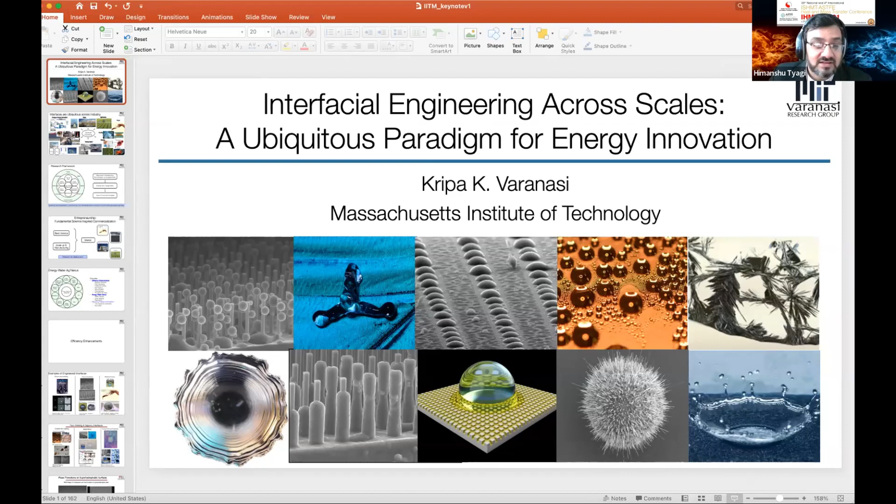Thank you so much for that kind introduction. It's a pleasure to be here at my alma mater, IIT Madras, where I learned engineering after high school. So it's great to be here and talking to all of you.

As Himanshu mentioned, my work is on interfaces, which is essentially the boundary between phases of matter, and where all the interesting things happen, including mass, momentum, charge, and energy transfer. Today I'll give you a few examples of what we've been up to over the past several years.

This is a very busy slide, but it shows how interfaces are ubiquitous across many industries, whether it's energy or power generation, oil and gas to renewables, and our work has touched a lot of these areas. Some of our recent work has been in the CO2 and hydrogen space, and also in the medical area, where we are looking at injectability of high concentration biologics and remediation of biofilms. In agriculture, we've been looking at reducing pesticide usage and pesticide pollution.

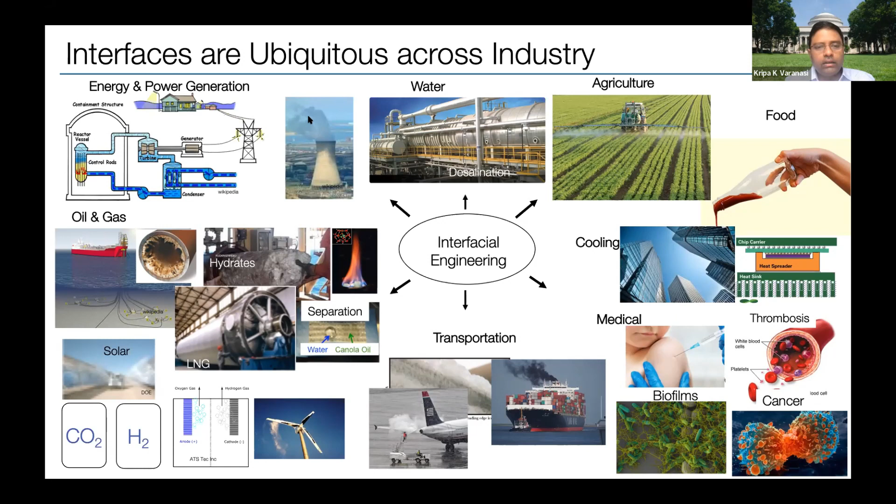Also at the energy water nexus, we are able to capture water that's given out of cooling towers, among other things. So while I will not be able to cover all these topics, I'll choose a few of them, and I realize that I have only half an hour today, so I'll try to see what I can get done.

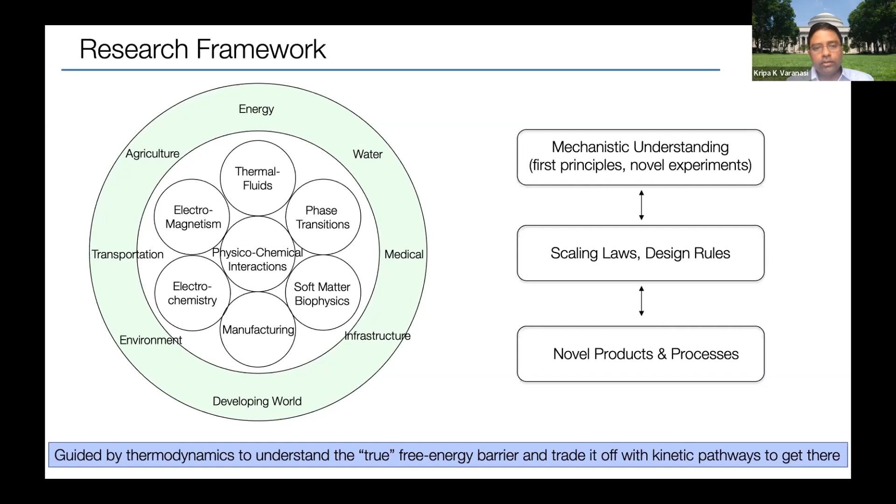Just quickly, as a group, we are very multidisciplinary. We work on a variety of topics ranging from thermal fluids to electrochemistry, and think about scale up and manufacturing so that we can take things to market. These are a few of the companies I co-founded with my former students, including LiquiGlide, Infinite Cooling, and more recently AgZen, where we are trying to reduce pesticide pollution.

As I said, the focus today is on energy, and we'll talk about energy efficiency enhancements that one could achieve by fundamentally tailoring interfaces. And if there is time left, I will also talk about a project on the energy water nexus, capturing water from the plumes of cooling towers.

So let's jump right in. Some of our efforts over the past last 10 years have been really to tailor interfaces, whether it's to reduce wetting of surfaces, such as in this case, bouncing droplets, where we've been able to overcome certain theoretical limits and reach points where you can bounce off liquids at extremely short time scales.

To phase transitions such as condensation, boiling, freezing, and crystallization, and controlling these phenomena by tailoring surface chemistry and morphology.

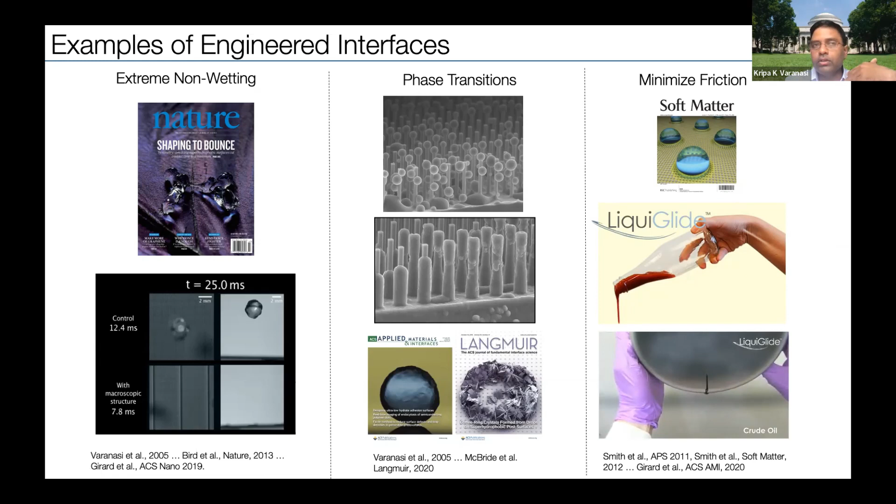And also creating these slippery interfaces where we've been able to show that we can tailor surfaces for a wide range of viscous fluids. For example, here there's a ketchup bottle where we can empty every last bit in the container, to here a crude oil that is in a container which can basically wet anything, and we are able to dispense every last drop so there is no wastage of the product.

And examples here show ultra thin coatings that we've been able to make, which can be used on condenser surfaces to promote what's called dropwise condensation, to even coating fabrics, conformally coating every fiber to create non-wetting fabrics using low fluorinated or environmentally friendly coating technologies.

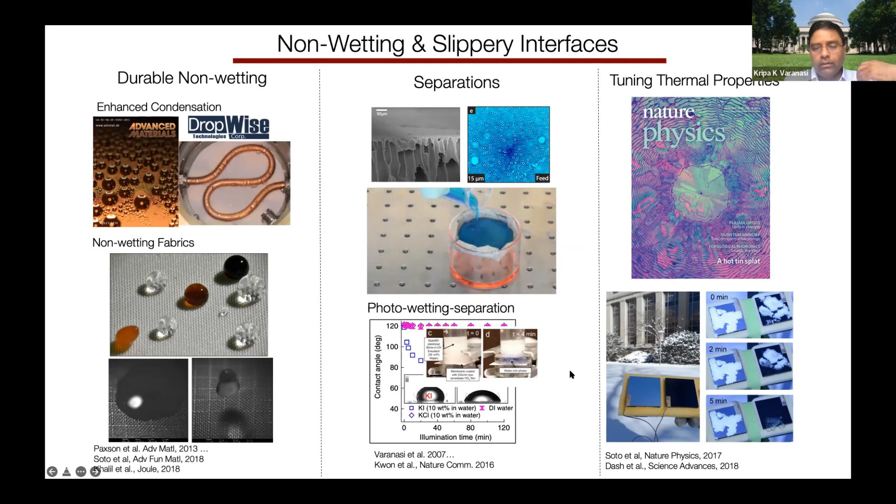One can use these to do separations, as shown here, where you can separate oil-water emulsions to prevent icing on surfaces. So I'll try to cover some of these topics today and see how far we can get.

One of the areas that got a lot of people in the surface engineering space excited was the use of what are called super hydrophobic surfaces. These were inspired by lotus leaves, where liquids bounce off readily and don't wet because of the structure and morphology.

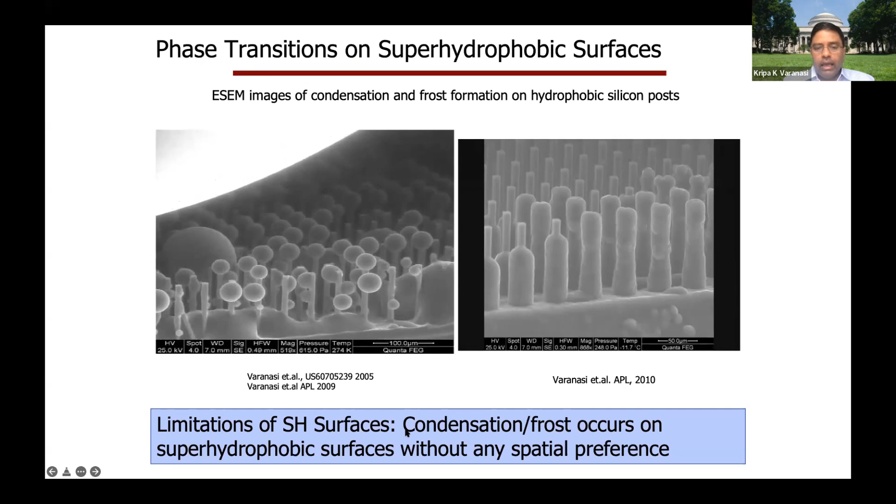But early on, when we did some experiments almost 15 or 16 years ago, we were trying to understand how we could use these surfaces for heat transfer applications like condensation or freezing. These are experiments done in an environmental SEM, where you can see nucleation and growth of droplets.

You see that they actually impale these structures, and these surfaces, which are hydrophobic for macroscopic droplets, basically transition and become wetting for a nucleating drop or frost building up on surfaces. The same thing happens when you go to a low surface tension fluid.

If you take a low surface tension fluid, it can easily wet these surfaces. So the question was how do we make this robust to a wide range of fluids? We've only talked about Newtonian fluids so far — if we go to non-Newtonian fluids, how do you make this stable?

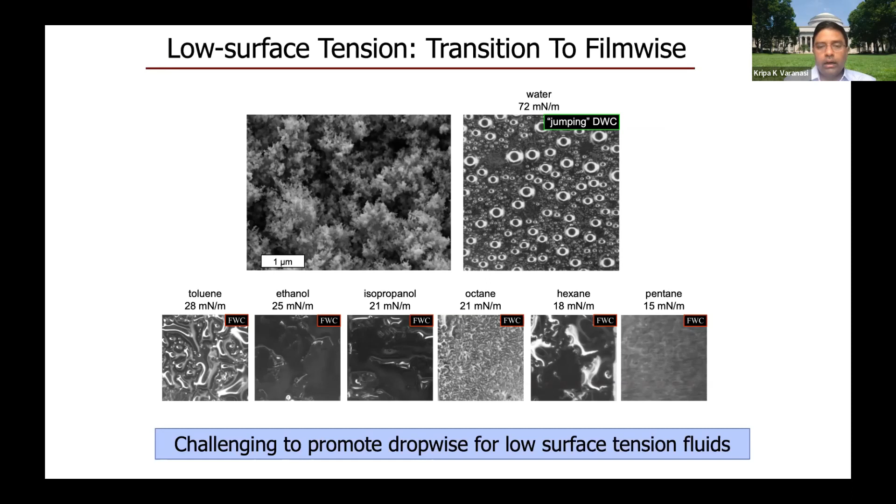In a condensation application, how do you promote dropwise condensation without being limited by infiltration of these surfaces? That led to a new paradigm in thinking about surfaces that can be non-wetting to a whole range of fluids.

Sticking of viscous fluids such as consumer products, whether it's lotions, food, or toothpaste, to fluids in the energy space like oil and gas, or things like flow batteries, or in manufacturing or medical — we are surrounded by these sort of viscous fluids.

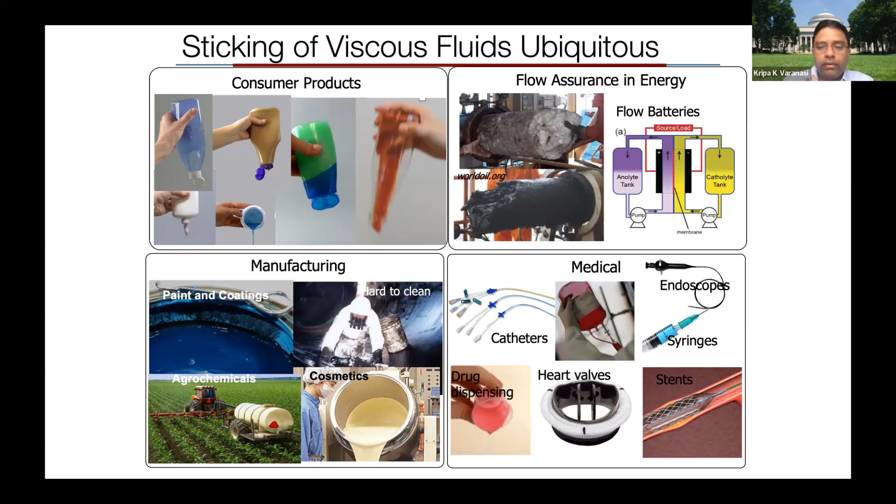The basic no-slip boundary condition essentially makes all these things stick to the containers they are in, and that leads to an enormous amount of waste. Believe it or not, almost 50 billion packages are sold every day, and if you look at all the waste remaining in them, that would fill up probably 100,000 trucks. There's a significant amount of waste because we simply can't dispense every last drop.

So here we developed a technology where we take a textured surface and impregnate it with ultra-thin liquid films. These liquid films are held there by capillarity and intermolecular forces, which allows the products to easily slip off of these surfaces.

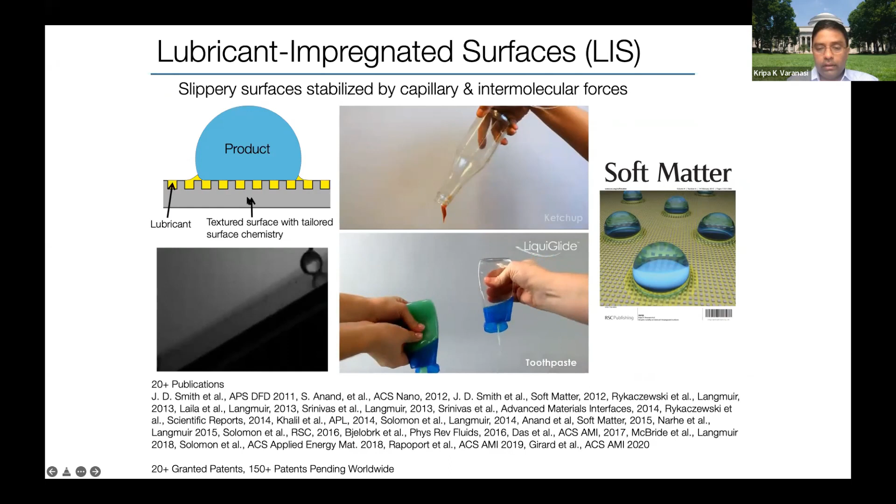You are seeing examples here of this ketchup bottle and toothpaste.

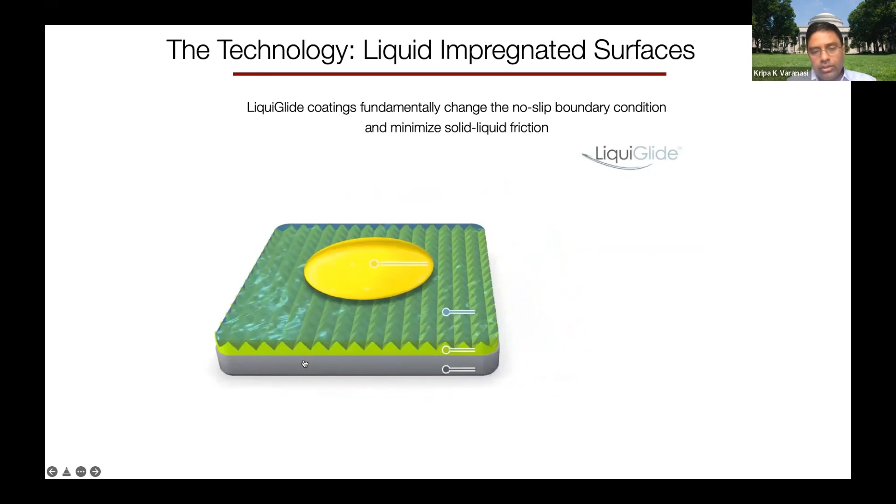The way this technology works, as I described, you take surfaces like these and create a liquid surface, or a liquid-solid composite, where the solid allows you to stabilize the liquid, and the product essentially now slips on the surface.

While this may seem very simple, the thermodynamics of this is fairly complex, and I won't go through it in detail. If you're interested, there is a paper that talks about this in detail.

This system has about 12 different thermodynamic states, of which only a few allow us to cause this liquid film to essentially spread atop these features in the presence of the product. As shown in these three scenarios, this helps retain a stable thermodynamic film that is able to give this sort of high mobility properties.

If you're able to do that, then you can really engineer products that have this feature. But if you don't do this right, you can end up in a scenario where this impregnated liquid gets displaced by the product, and then you've got a very sticky situation on hand.

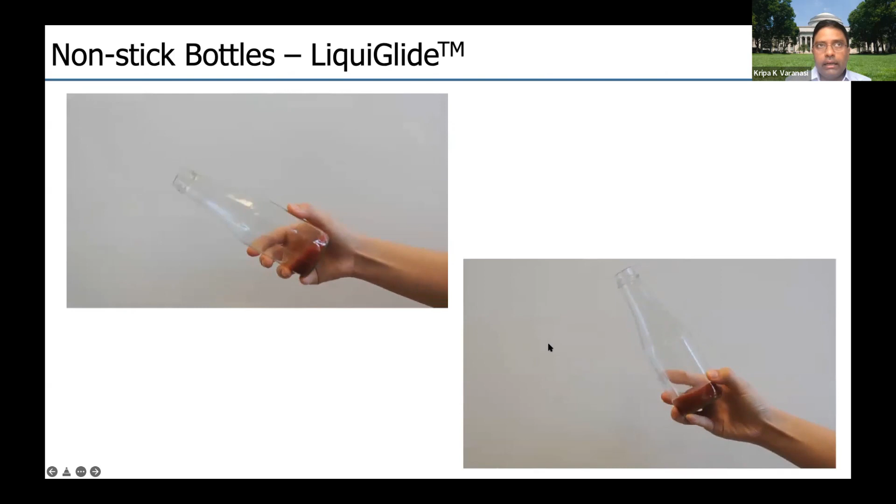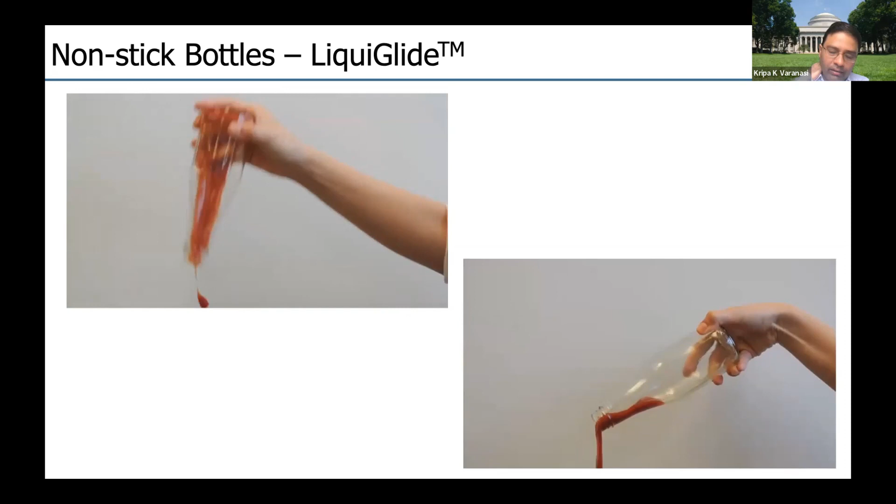So I'll show you a few examples of what we did with this. We had this technology, we knew it could apply to a whole range of products, and we were thinking of commercializing it. One of the things that came up was my wife was trying to get honey out of a bottle, and she said, why don't you apply it to this? That led us to think about bottles and consumer products in containers.

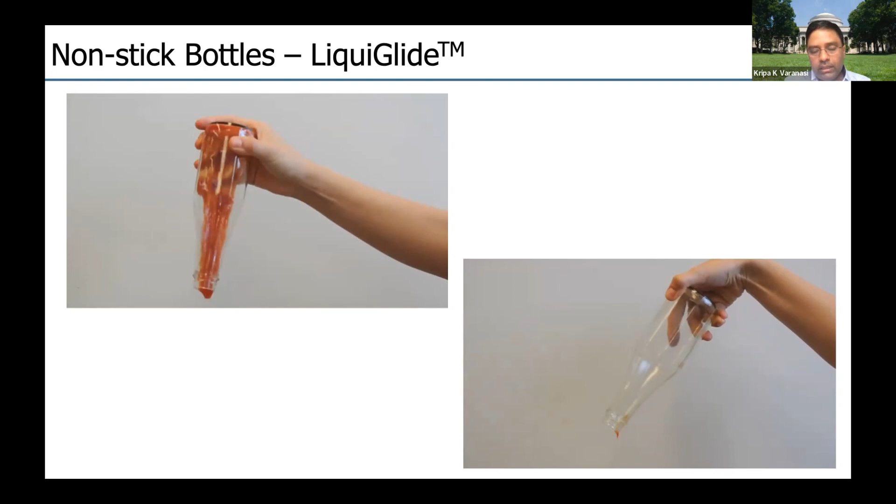We were able to design a surface entirely made of edible materials that can dispense every last drop. We tried this on a number of different materials, and soon I started finding that on average about 5 to 10%, and in some cases significantly higher, 25%, of the product could be lost. This is pretty ubiquitous.

When we actually went and released some of these, the press went kind of crazy because they found this to be a very interesting story. I'll let you watch this.

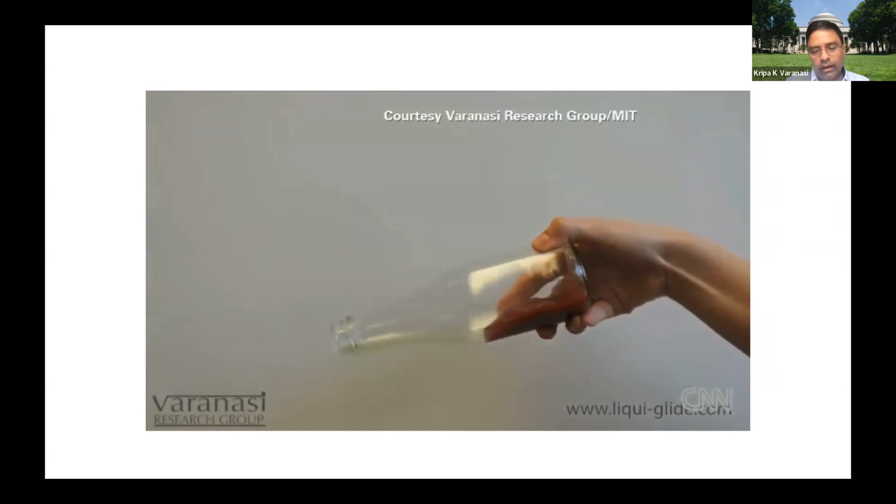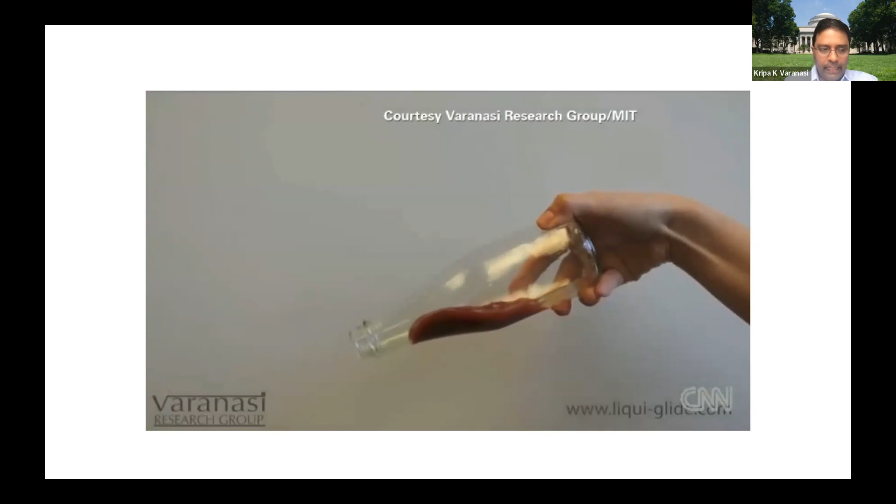Look at that thing slide. Amazing. Oh my God, our long national nightmare is over. Mechanical engineering students at MIT a few years ago came up with a super slippery coating that makes anything from ketchup to mayonnaise practically leap out of a bottle coated with the stuff. They call it LiquiGlide. Even Tony Soprano would be beholden to these students. Look how annoyed Tony gets at the dreaded ketchup clog. And if Colin starts talking, homicide. LiquiGlide, let it slide. No more banging with shoes or mallets or sucking up ketchup. For traditional bottles, LiquiGlide could mean their last gasp.

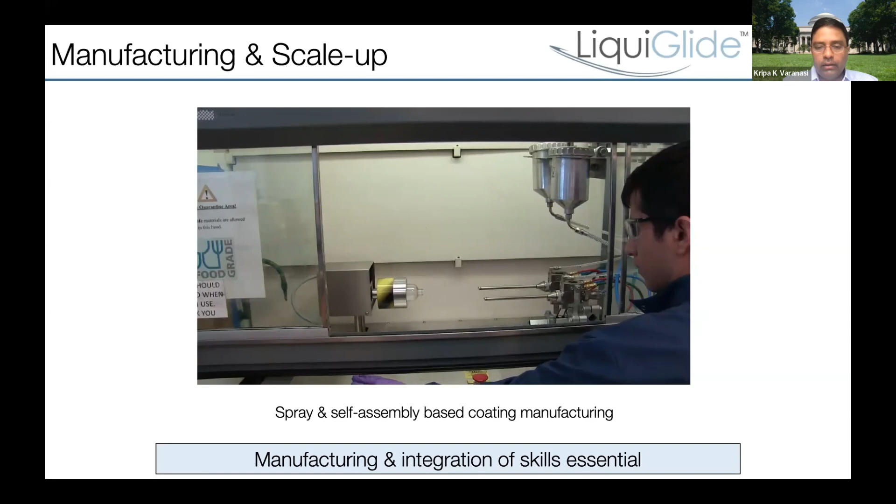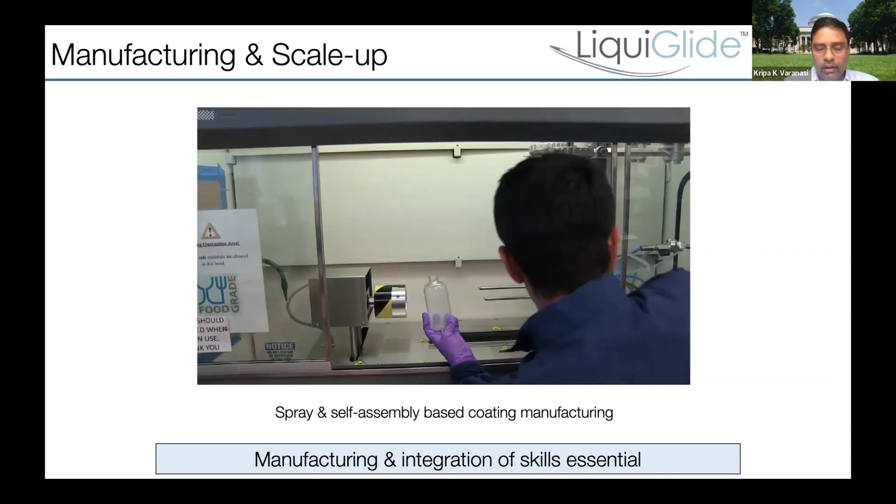The other thing was we also worked on how to manufacture and scale this up as we were developing the science. Here are some early scale prototypes where we've been able to make these coatings very easily using spray-based techniques. Today, we can do this in several hundreds of bottles per minute.

I'm just going to skip this, but very initially we also took this to market and had people react, and they were all very favorable and really wanted the product. All of that led us to start this company, and we were able to start looking at ways to scale up and take this forward.

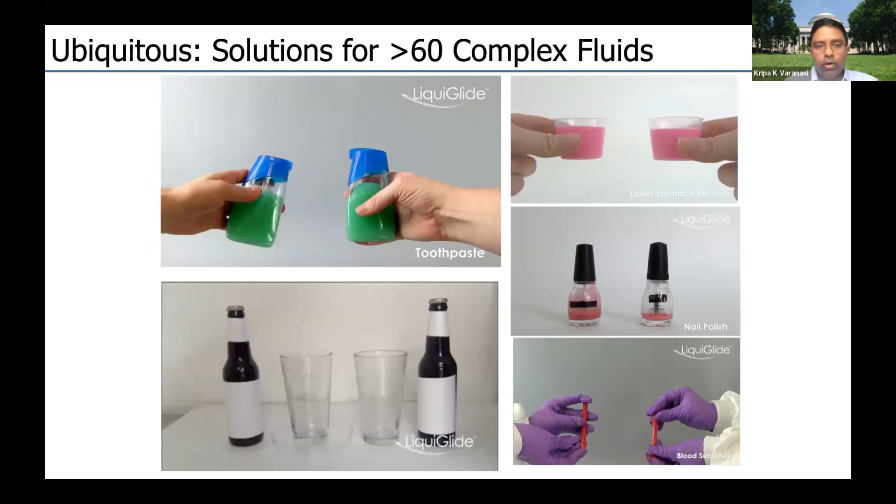We applied this again to a range of different products, and very recently, I'm glad to say that we actually launched with Colgate. For the first time, toothpaste has been sold in laminate tubes for more than a century. Things stick to these laminate tubes, but also, more importantly, they are not recyclable, so they end up in a landfill.

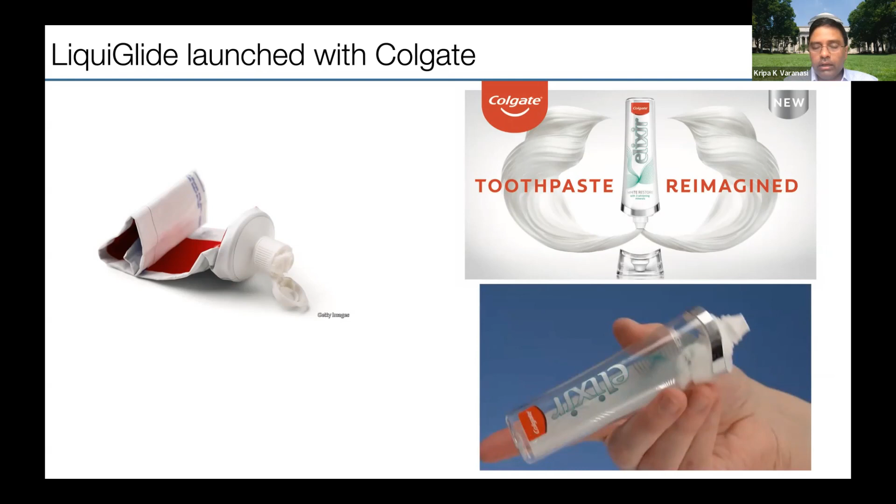Here, for the first time, there is a fully recyclable and completely transparent toothpaste tube that not only gets you every last drop but also meets some of the sustainability goals for Colgate. They've been very excited, and this has been received very well. It launched in Europe and will come to other countries, showing how we went from basic science and experiments in the lab all the way to market, and we were able to launch this product and put it on the shelf.

This sort of won a number of awards in the packaging space, and Colgate has been extremely happy with this product. And we are taking this to other things like cosmetic packaging and so on.

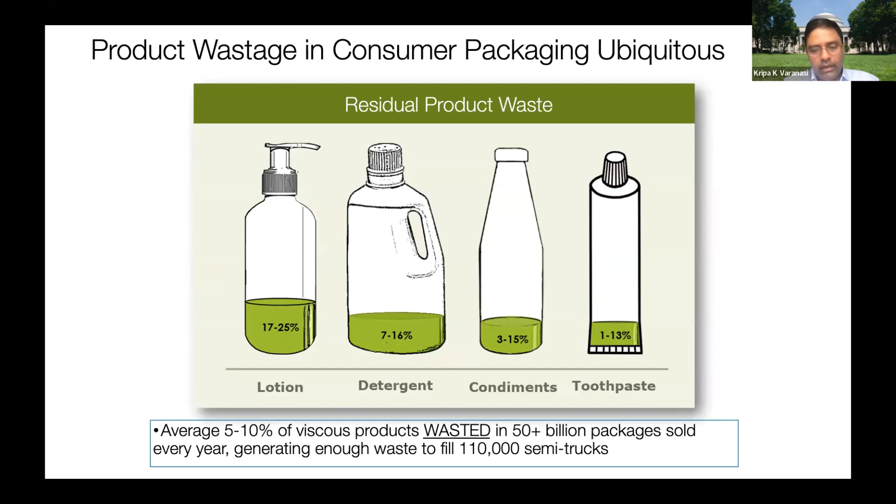So coming back to the bottom line, we can actually get rid of this waste. And what that means is, when you're looking at sustainability, the amount of carbon footprint left in all that wasted product, no one even thinks about that. So we can save all of that. Also, when you leave a product behind, the package is not easy to recycle, so you have to wash it out, and there's a significant water footprint. Our goal here is, with this technology, we can really reduce the CO2 and water footprint by eliminating waste. But one can also concentrate products and thereby reduce the amount of water you're shipping around. Most products have to be diluted because it's easy to dispense, but with this technology, we can make concentrated products and simplify all of this plastic packaging.

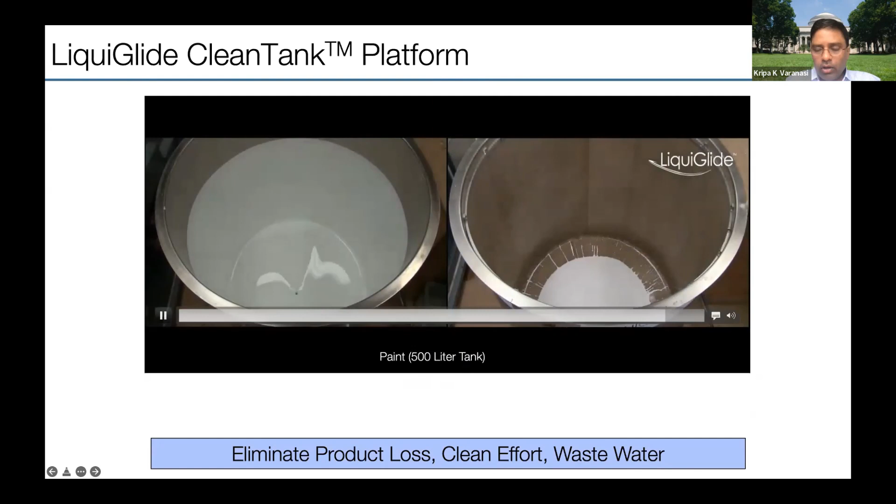There are a number of other applications of this, whether it's in manufacturing. Here you can see we can apply this to large containers, where in this case paint is being dispensed. In a traditional case, you have paint stuck here, so you have to use water to clean it, and that water comes out as wastewater that has to be disposed. But with this technology, you can get every last bit of the product, and you don't have to clean these surfaces.

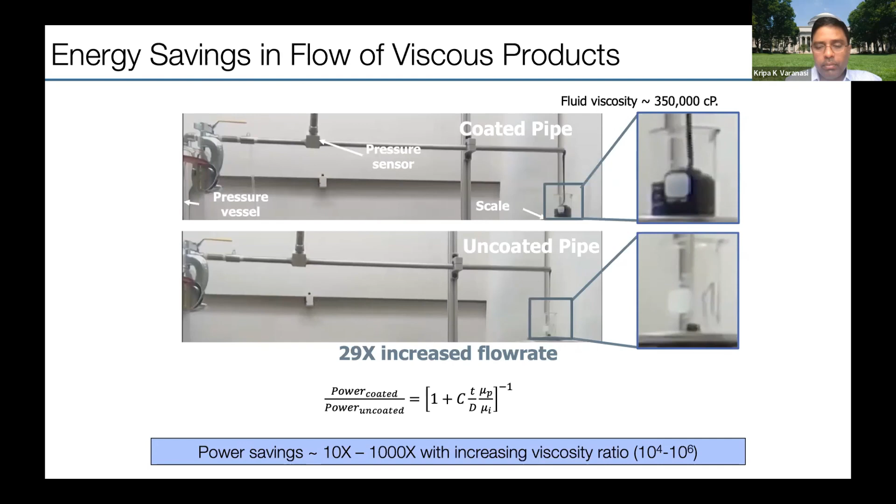One could also reduce friction drag in pipes. Here you can see that by applying this technology, highly viscous products can actually be passed through pipes, and you can reduce friction, and thereby pumping power, leading to significant power savings in pumping.

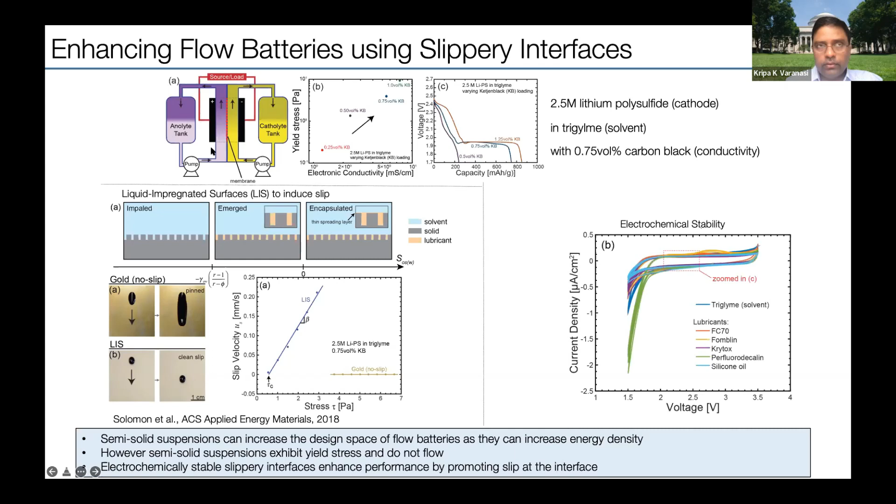Here is an example where we use this technology in flow batteries, where the interesting thing is you're using the electrodes of both liquids, and the capacity increases when you increase certain ingredients, such as carbon black. But when you do that, these liquids become basically semi-solids and they don't flow, which is a big limitation. But again, by using these surfaces, which have to be both slippery and electrochemically stable, we can create flow batteries where you can flow the flow electrode even when it becomes highly viscous, and you're able to increase its performance and capacity.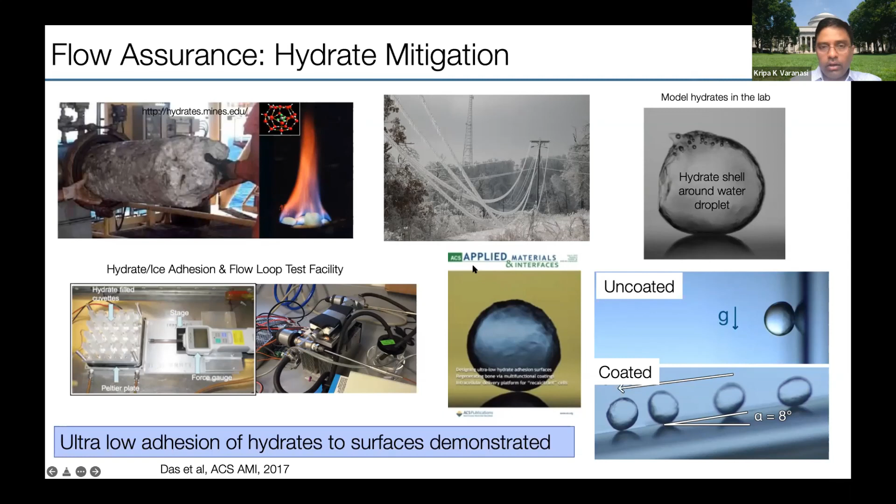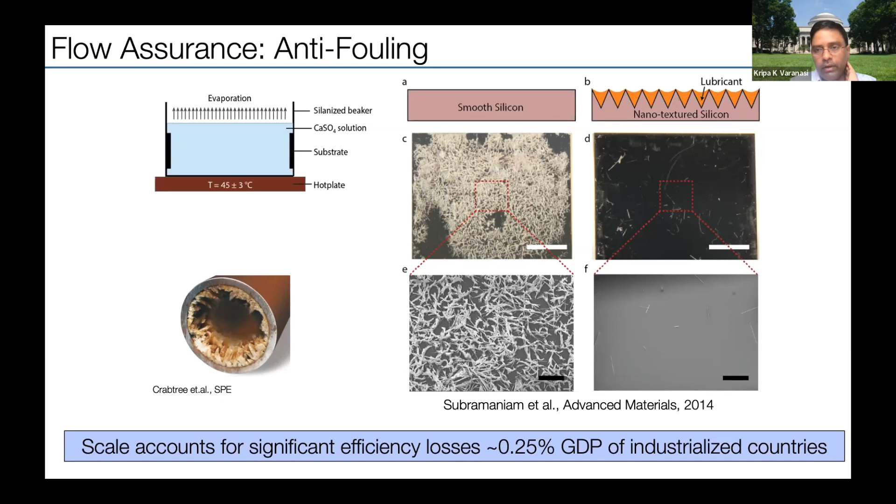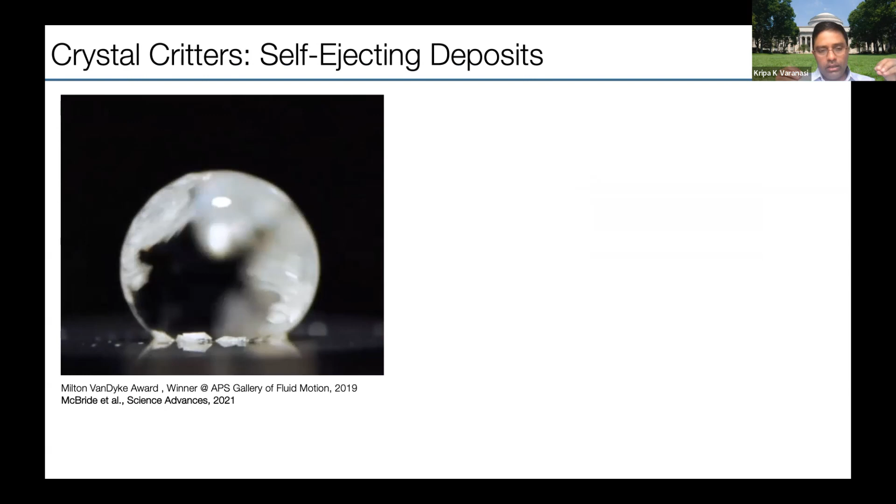Another interesting study we did recently was using the right kind of nanotextures, as in this case with an evaporating saline drop. What happens is you can actually control crystallization, or confine it to certain points, preventing lateral growth of crystals. Once that happens, it can cause crystals to self-eject from surfaces. So here you can see this fouling material, which would normally have easily fouled the surface, is able to grow legs and self-eject. And since this looks like a weird bug, we named it a crystal critter.

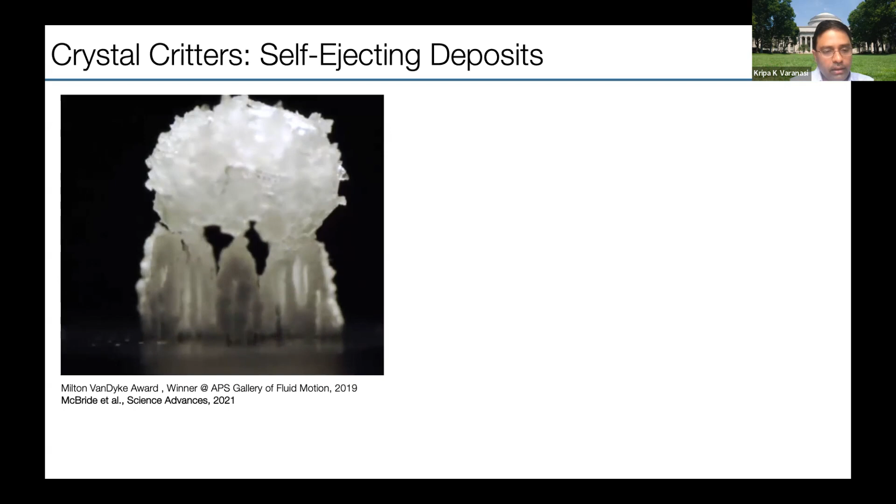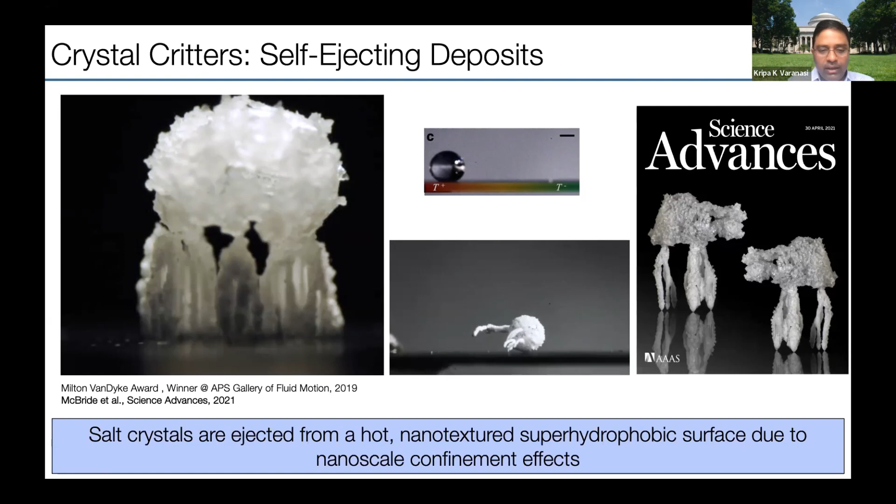By using temperature, you can do some interesting things. In this case, you can actually create a temperature gradient and cause these legs to form, causing this critter to move away from one end to the other in a way that this fouling material ejects itself and walks away from the surface. We were able to create something that, if you're into Star Wars, looks like an AT-AT walker. Shows that we're having fun doing science as well.

Another interesting thing with these surfaces is that because they have very little adhesion, even when you apply a thermal gradient, you can induce what's called thermocapillary forces. We were able to see pretty high velocities, unlike anything for a thermocapillary effect, getting to millimeter per second kind of droplet velocities.

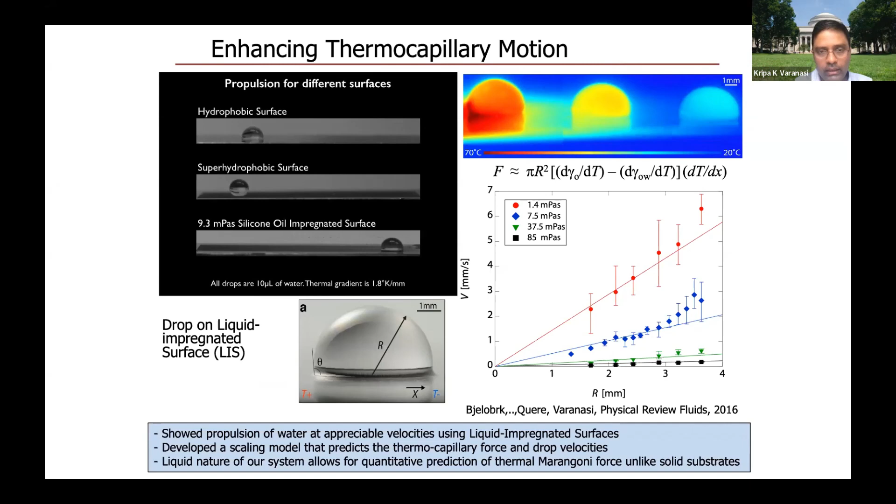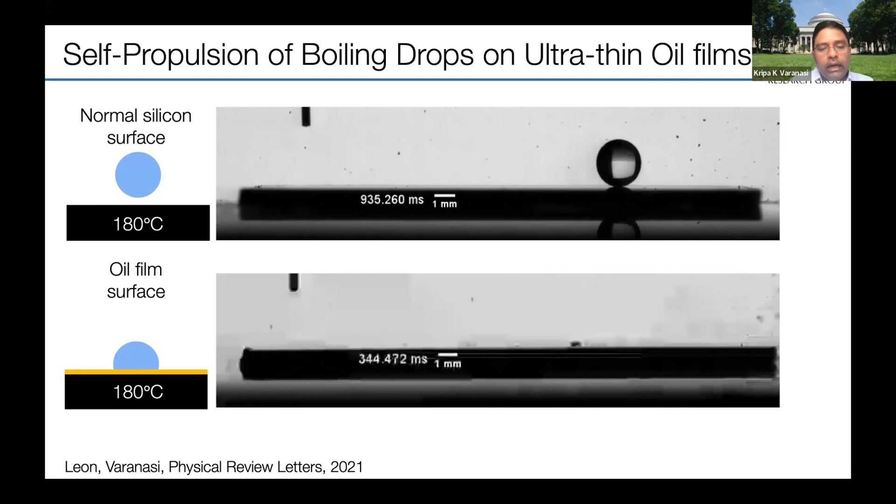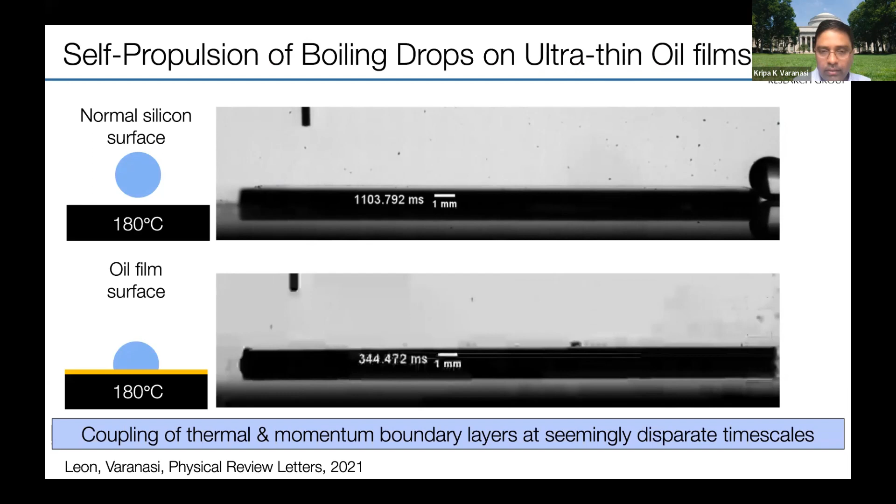This is, in fact, a very cool coupling of thermal and momentum boundary layers at disparate time scales. It's a very interesting effect which, given the limited time, I'm not able to go through.

One can then use these technologies for applications like heat exchangers, whether steam cycles, liquefaction, or refrigeration. We have condensers and boilers, and if you look at power generation in general, almost 85% of the install base today uses steam turbines for conversion.

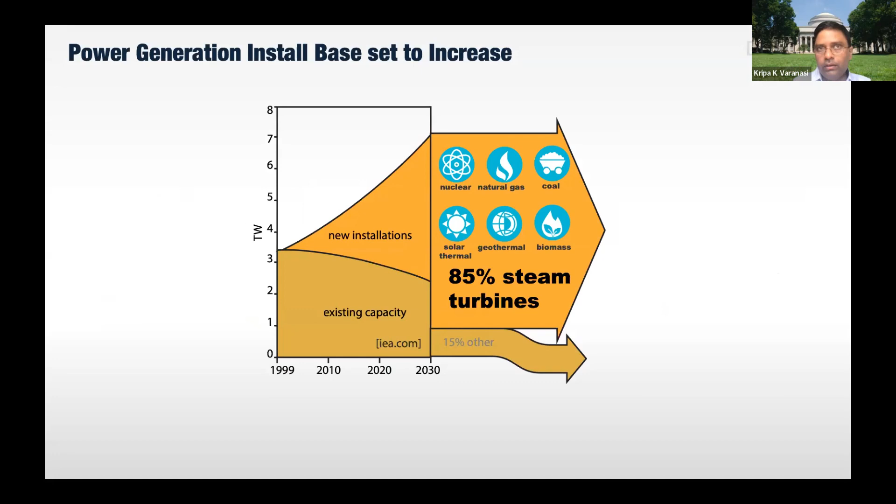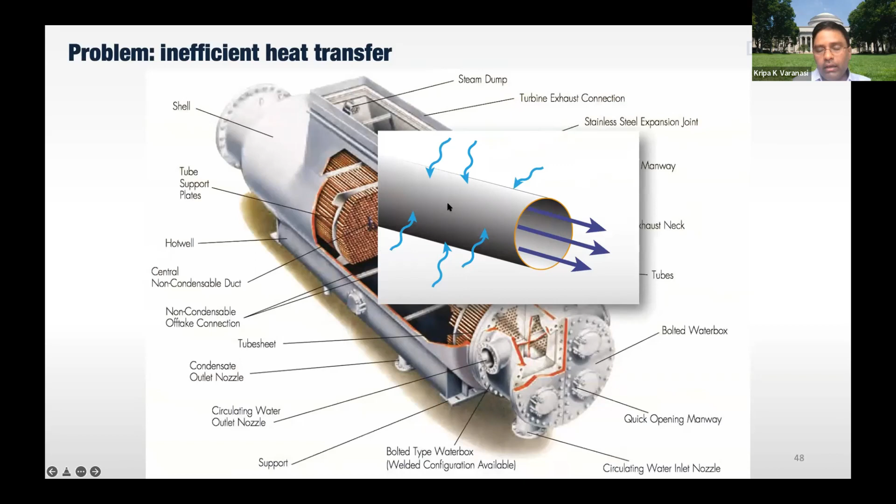One of the key things, of course, is you have your condensers and boilers, and in all of these cases, you have a condenser tube where a water film or liquid film forms on the surface, and that leads to a resistance for heat transfer. The film becomes a resistance, but you're able to shed these as drops, which has been researched for a long time. Then you can get significant increases in heat transfer, and we've been able to show almost 7 to 10x increases.

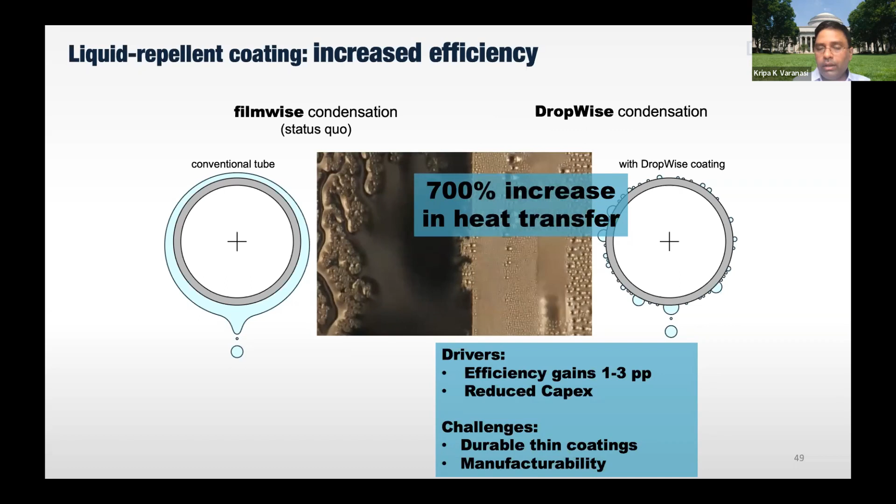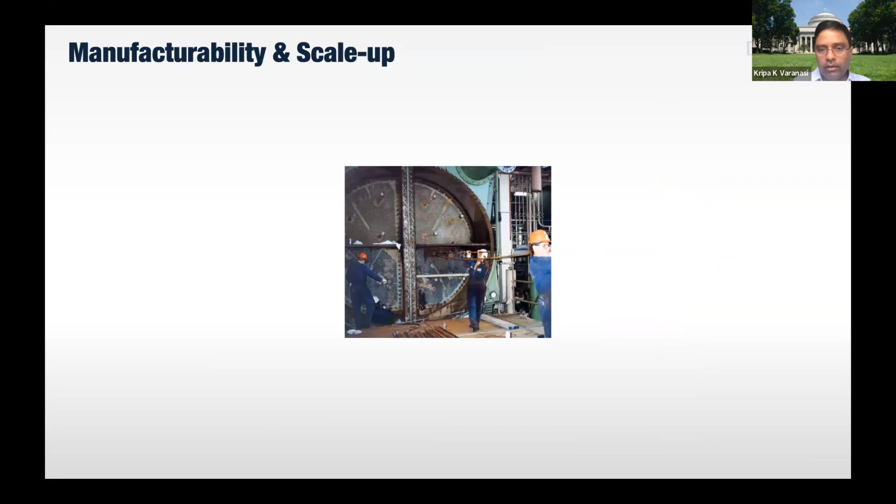But the key point here is, why is this technology not applied across industry? The issue is that you have challenges to durability and manufacturability. What I mean is, if you take a regular industrial condenser like this, you can see these tubes are just slammed into these slots, and these things are pretty large in scale.

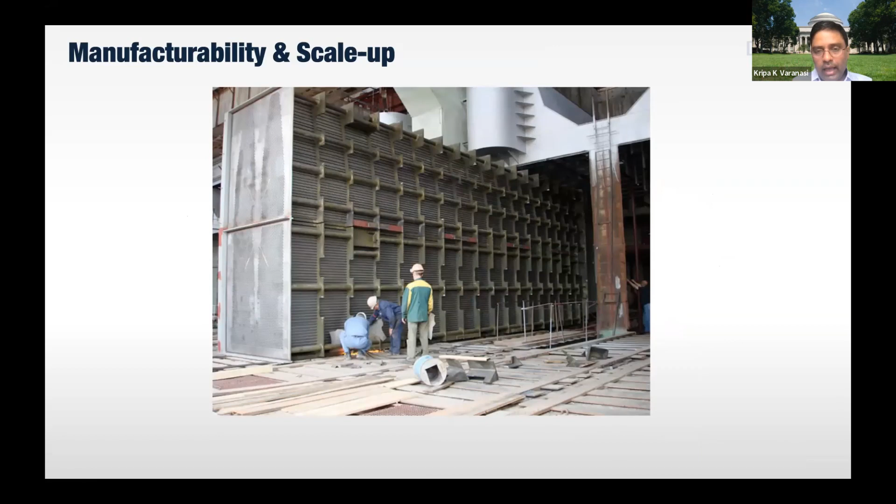Coating a tube one by one doesn't actually make economic sense. And if you go to condensers like these, which are in oil and gas, they have crazy shapes, and it's almost like you can't even coat them, and you can't even take these tubes out. So you should be able to do this in situ and on a retrofit basis.

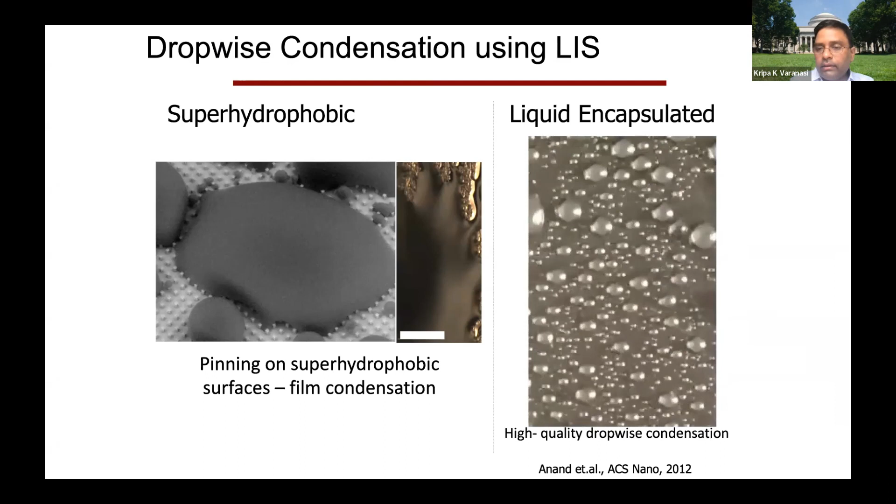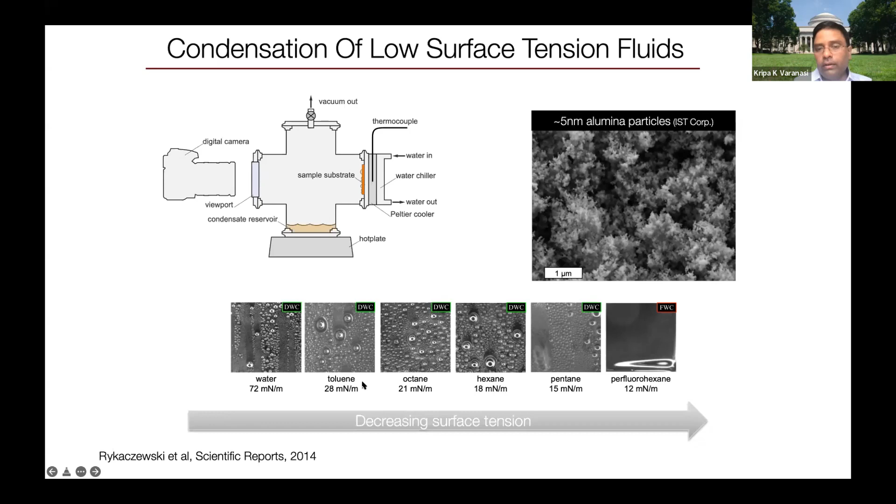As I mentioned earlier, if you just use a super hydrophobic surface, it's not going to really work because you'll end up forming these films. If you do liquid infused surfaces, you can get a certain amount of robustness, and you can maybe spray coat these surfaces. But even then, the issue is durability and longevity over a long period, almost like 5 years. We've shown that you can apply this to low surface tension fluids as well. And knowing all these issues, we actually developed a totally different technology.

This uses room temperature vapor deposition, where we're able to create less than 100 nanometer films that can be applied to a range of surfaces, because this system can conformally coat these tubes or other heat exchange surfaces.

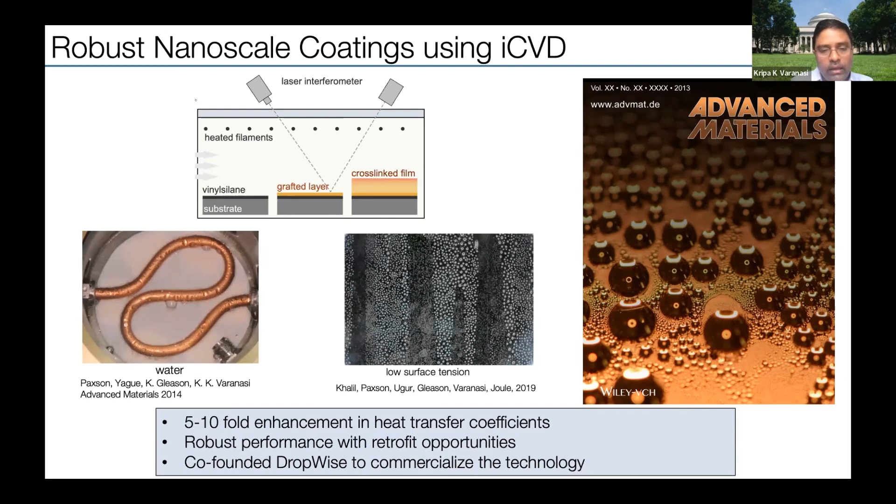That led to a pretty robust way to do dropwise condensation, which could also be applied to very low surface tension fluids. Low surface tension fluids are notoriously hard to condense in a dropwise manner because they want to spread on any surface. But by creating low hysteresis, we're able to achieve dropwise condensation even for these kinds of systems, and actually boost heat transfer quite significantly.

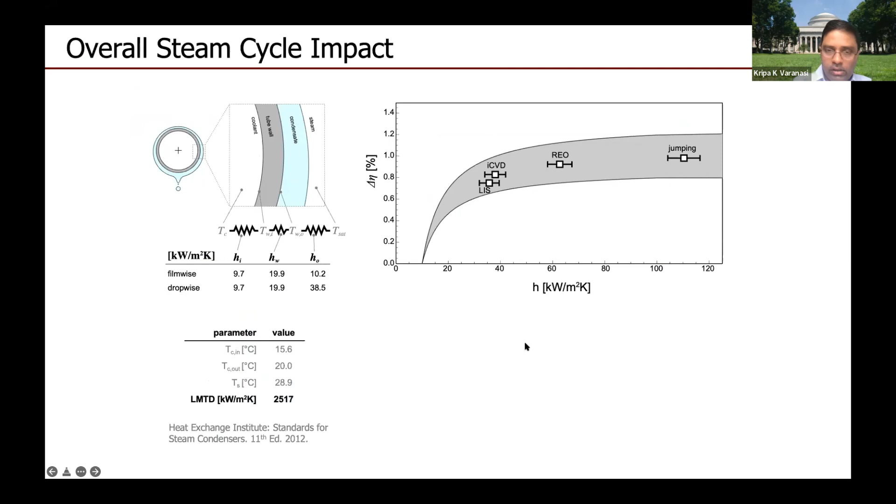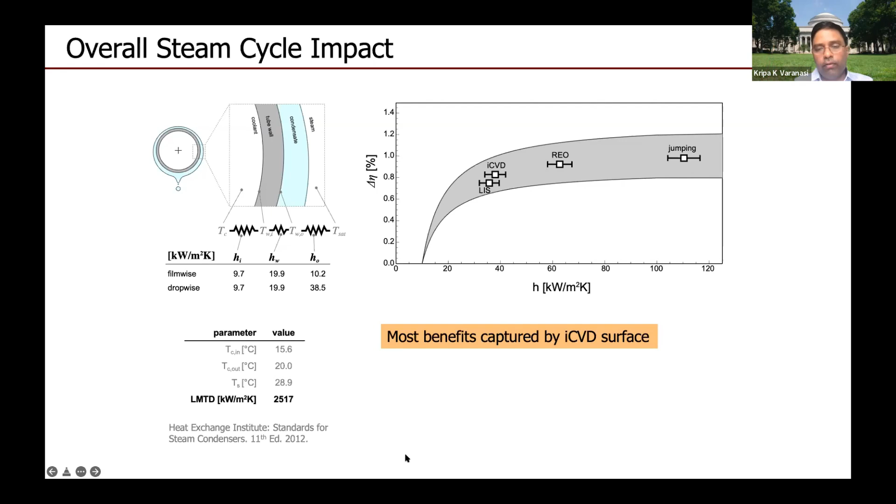So the key is, how good is good? What you find is that in terms of efficiency gain, because the condenser resistance is one side, but there's also the coolant, eventually you can reduce this and the other side starts to catch up. So there's really no point going to significantly high gains in heat transfer because the other side will catch up. One could stay in that zone where you get almost a 3 to 4x increase, and that's actually pretty good enough.

So I'll switch gears in the last few minutes to boiling. This is an example of a Leidenfrost drop, which you probably see in your kitchen, where when you heat up a surface, the drop bounces off on a hot surface. That actually limits cooling, so we have created super hydrophilic nanotextures, in fact a hybrid surface that allows liquid to actually adhere.

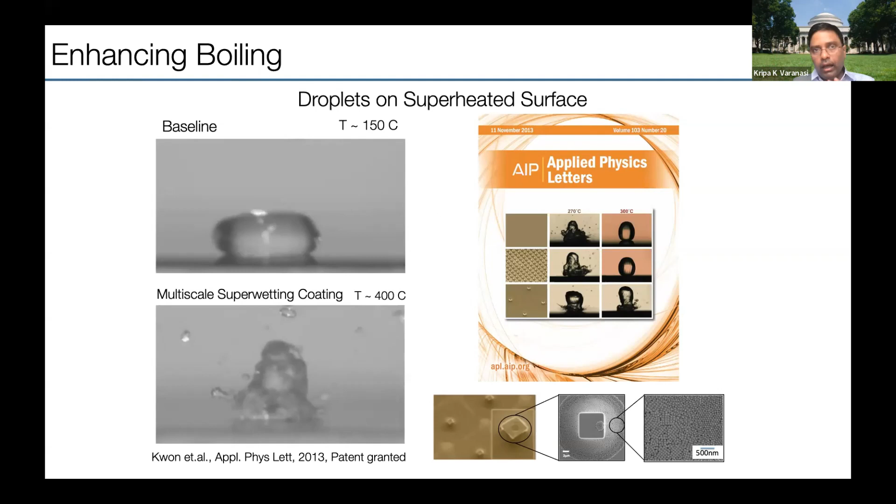The key point here is, if you make these dense nanotextures, it doesn't work, because the vapor pressure will actually kick the droplets off. So what you want is a hierarchical surface where you allow for vapor escape while still causing wetting of the liquid.

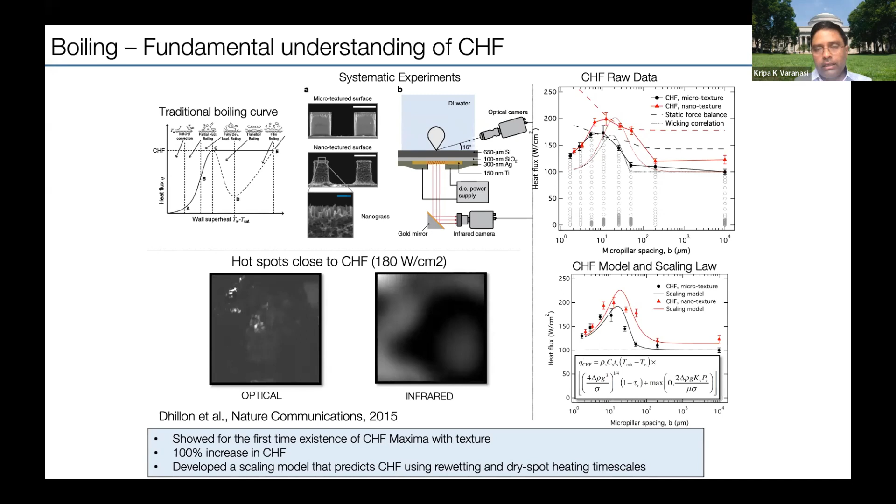If you take this to pool boiling, we've been able to show some nice studies using simultaneous high speed and IR camera, visualizing these boiling bubbles. We're able to show that you can get a significant increase in critical heat flux with texturing because it helps re-wetting the liquid. But there is a limit, in the sense that you should be able to re-wet the surface before a dry patch can grow. What's limiting the re-wetting is actually the viscous resistance also posed by the surface textures. So capillarity helps to wick, but viscous resistance will prevent you from getting there.

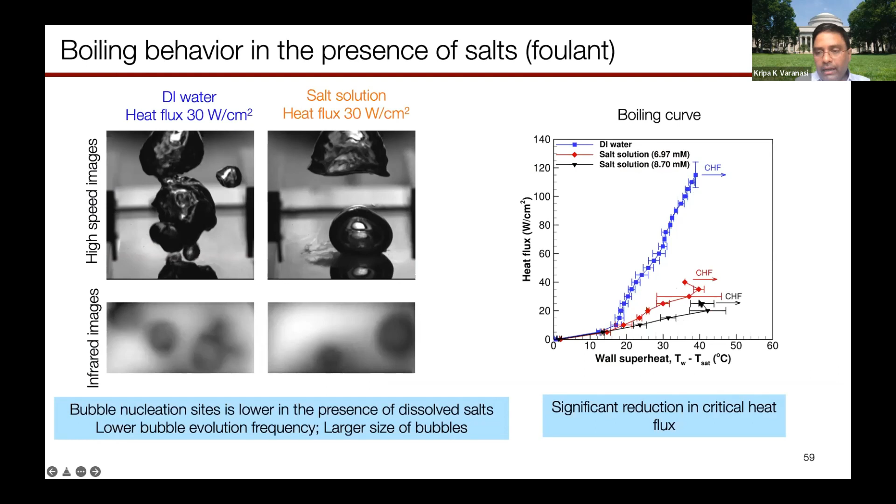And then lastly, the use of saline droplets. When people look at boiling, they usually look at pretty clean DI water or clean liquids. But actually our real fluids are not that clean. So here what we have shown is that if you use even a little bit of foulant, like in this case salt, the critical heat flux dramatically drops. That's because you get crystallization and deposits of fouling layers building up, and that leads to pinning of bubbles and growing of hotspots.

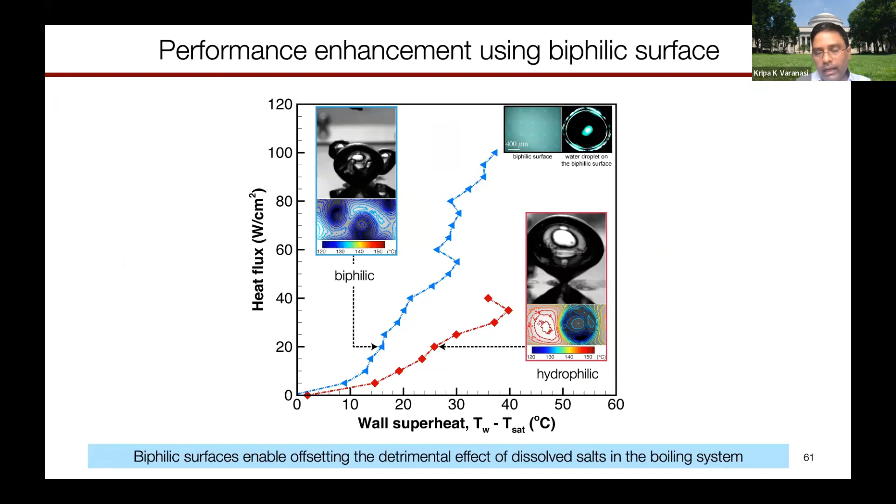Counterintuitively, we found that if you go to a hydrophobic surface, which is not good from a bubble perspective because it holds the vapor, it actually creates a region where you don't have supersaturation or buildup of scale in this case. By using a hybrid biphilic surface, you can promote a situation where you reduce the buildup of these foulants, and so in a real scenario this can give you enhancement and prevent any critical heat flux issues.

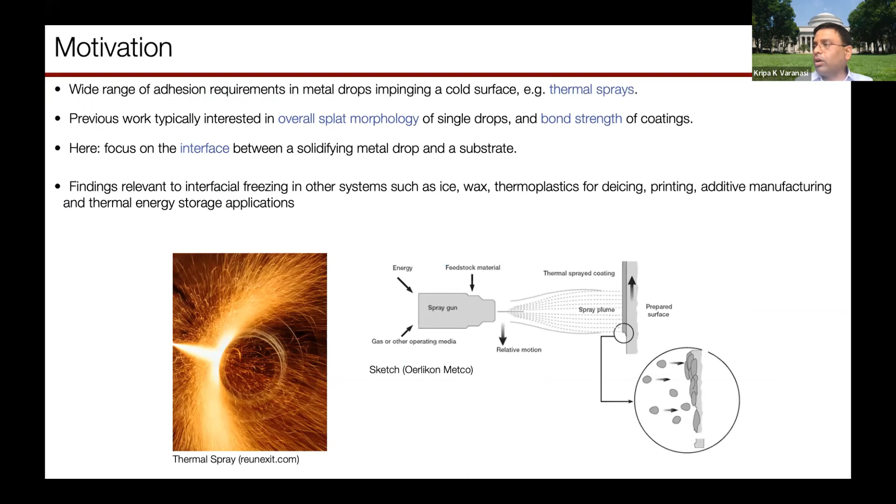Believe it or not, about 40% of total freshwater withdrawals in the US happens, is earmarked for power. Globally, about 3 trillion gallons of fresh water goes through these cooling towers. If you take a single 600 megawatt power plant, it uses as much water as 100,000 people could use, about 1,000 million gallons of water. This also costs a significant amount of money for the power plant, and in some cases people are not allowed to produce plumes.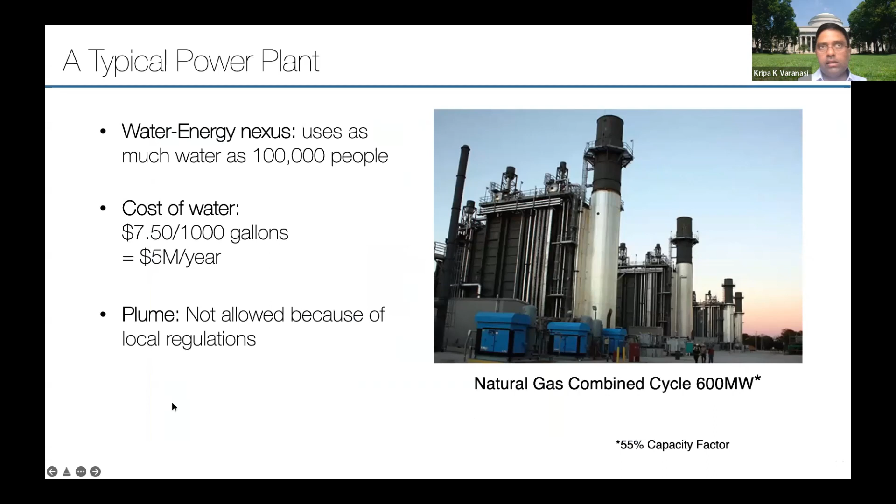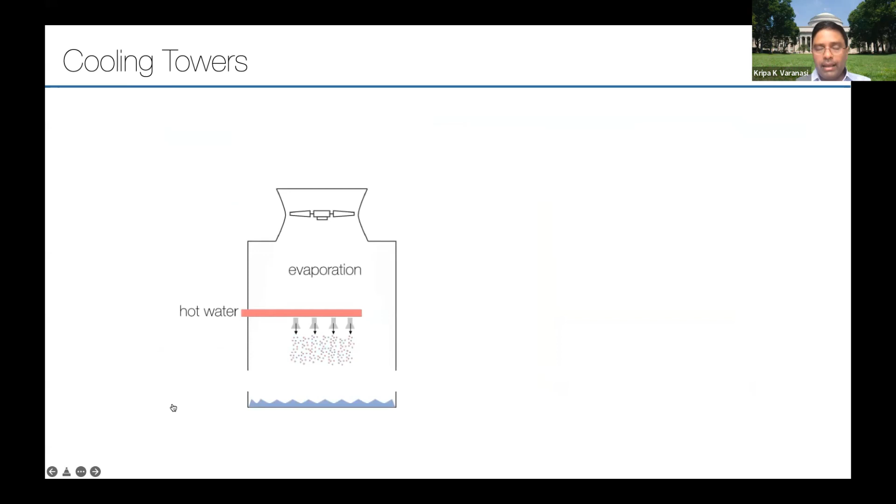For example, if you're near an airport or an urban area, this is a great place. If you're able to capture those plumes, that can have a significant impact on the energy water nexus problem, and in fact the water problem that is a global water scarcity problem.

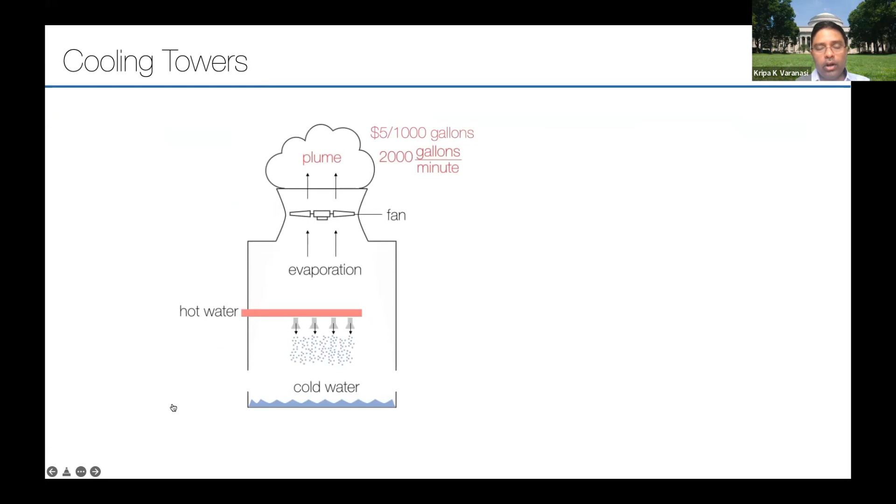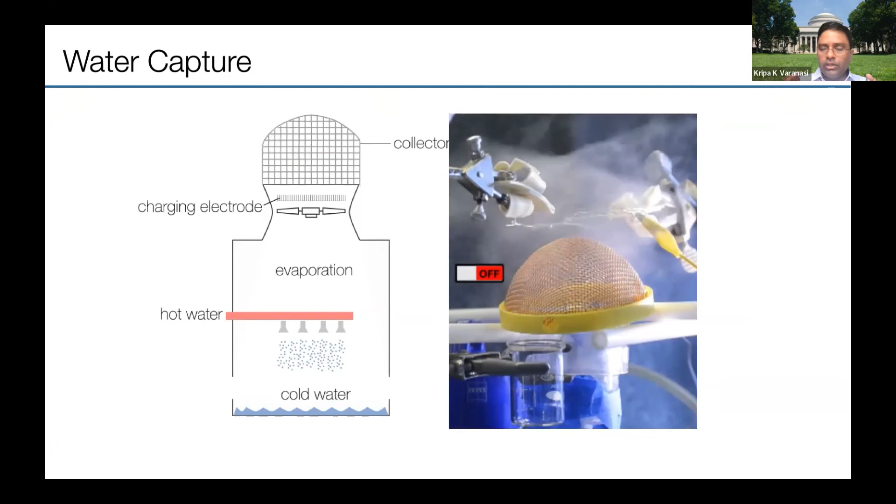So what we have done is built up a mock cooling tower in the lab. These plume droplets that you see are very, very tiny, about in the tens of microns scale. To be able to do this, we developed a technology where we inject charge, and by injecting charge, we create a different force, an electrical force.

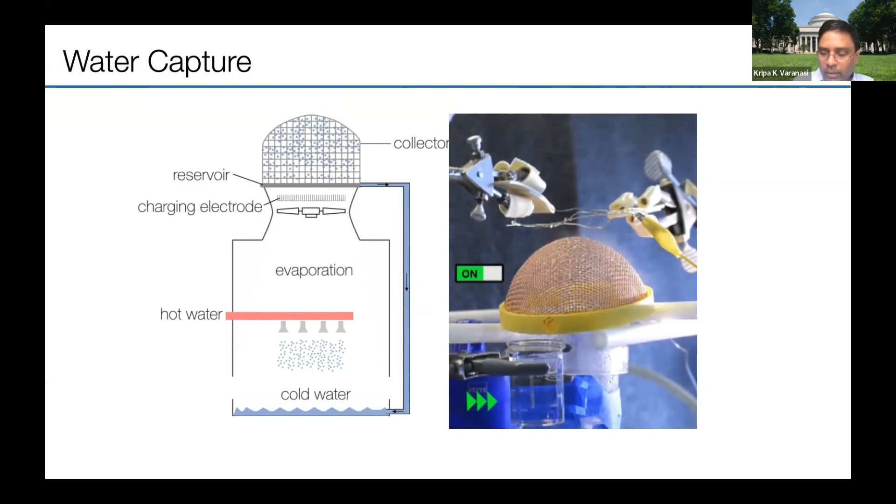So you see here on this video, let me go back. What you see is we have used the same plume that's coming out, and we have a coffee strainer as a mock-up. We switch on the electric field and the plume disappears, and all of that water is now captured and drained back and collected. This water is now demineralized and extremely pure. You can then make use of this high quality water, whether you put it back into the cooling tower, or use it for other purposes such as boiler feed, and in some places even as drinking water.

So what's happening here in a nutshell is, people use meshes and so on to capture fog, and the efficiency of these systems is extremely poor, because these droplets follow the wind. This is an illustration of a single mesh wire, so the drops actually go through and are only captured through inertial impaction, and a lot of these drops go by. So the efficiency of such fog collectors is about only 1%.

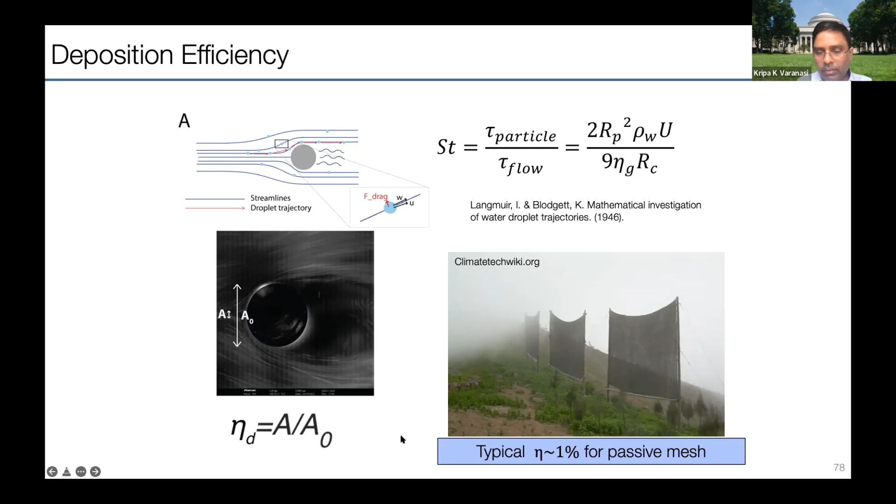So what we have done is by injecting charge, we are able to create a new force that takes these drops and brings them back to the collector. There's an electrical force driving them, and you can see that a significant fraction, almost double the size of this mesh wire, of drops that are going away are making a U-turn and coming back and getting captured.

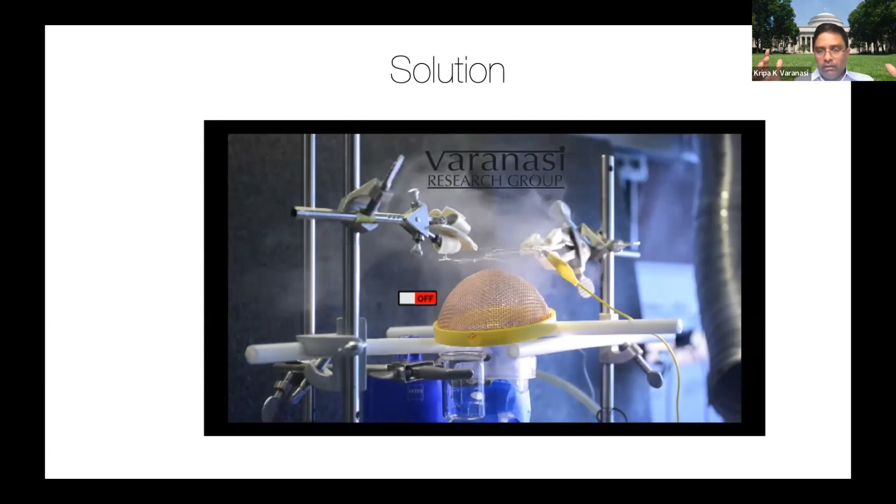So we developed this technology, and I'm going to play this one last time. You can see that this fog coming out of this cooling tower is being captured by this charge injection and electrical force.

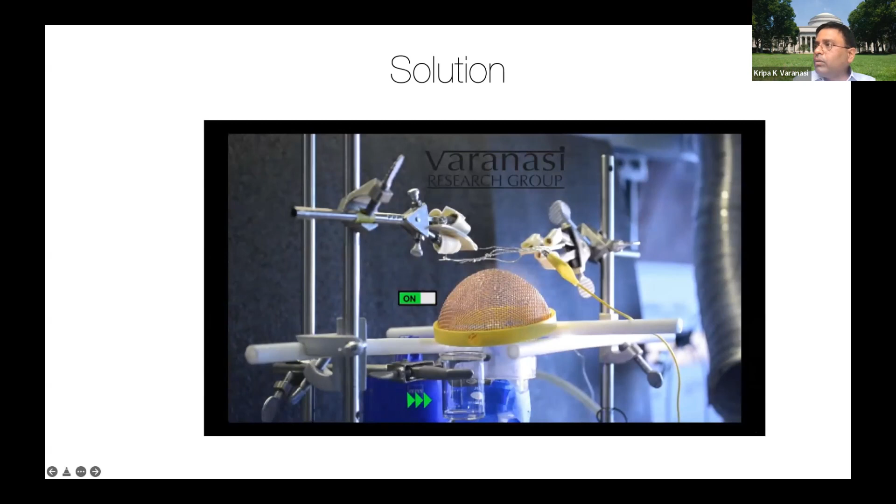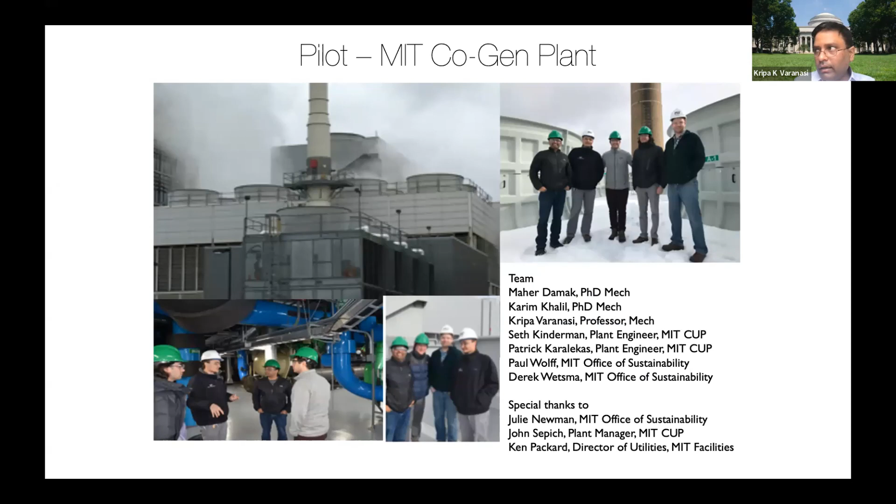So what we did was we then went and formed a company to commercialize this technology. The bottom line is, say we go back to the combined cycle plant, we could be saving about 150 million gallons of water, about $1 million in savings for the power plant, with only very little energy usage, and we can be eliminating plumes. This is a company we founded with my students, and we applied this technology on an MIT power plant to prove this out before we formed the company, and we have been successful and made this work.

I'll leave with this final note: if you take countries, there are power plants along the coasts that use seawater for cooling. If you were to use our technology, all the desalination is already being done for you, because you're already heating up the water and doing evaporative cooling. So the plumes coming out of the cooling towers are actually fresh water, and we just have to capture them.

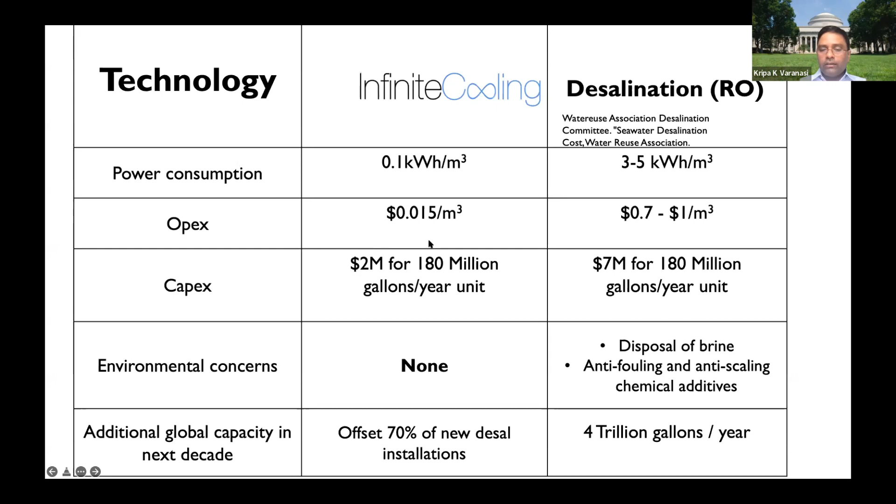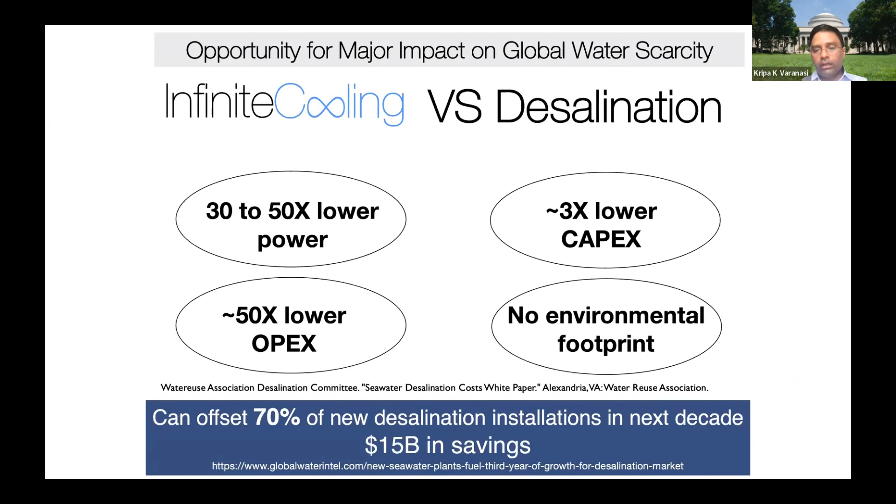So when you compare our technology, the company we founded is called Infinite Cooling, to traditional RO desalination, we are about 30 to 50 times lower in power consumption and low OPEX costs. Importantly, we can apply these to power plants, and these power plants can become combined power and water, significantly disrupting the desalination space. For example, I don't know if you heard about this Cape Town case a few years ago, where they ran out of water.

And to avoid this, they built a desalination plant where the cost of water is about $12 per kilogal. There is a nuclear power plant about 15 miles from the city, and if we were to do this infinite cooling technology, we'd be at 8x lower cost and 75% more production of water, because all the waste heat is already being used there to evaporate water and purify it, and all we have to do is collect that. So that's infinite cooling, and with that I'm going to pause.

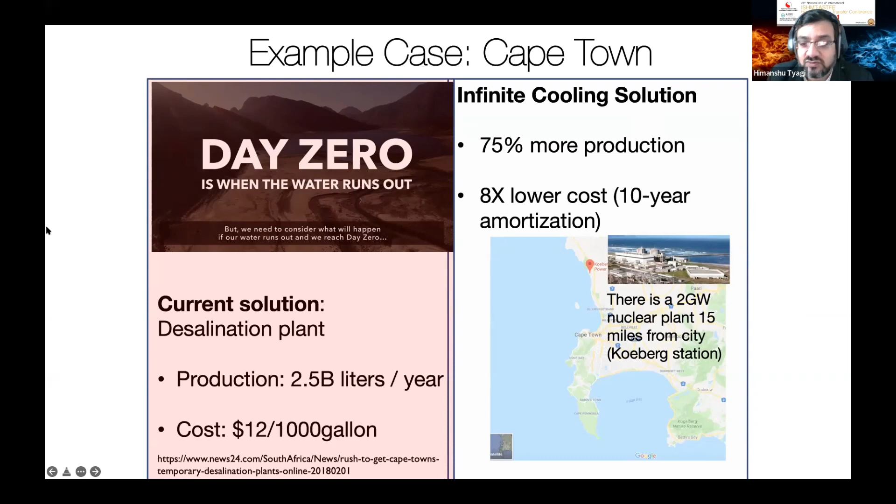So regarding the plume, this is essentially like getting precipitation, just like it happens in rain. So we are getting that quality of water, isn't it? Yeah, so basically, because you're doing evaporative cooling, the vapor from the drops comes out, mixes with the cold air, and precipitates, forming fog droplets. So yes, it's demineralized water. It depends on the surrounding - if the air is polluted, you may have some pollutants in the water, but that could be purified much better than starting from seawater or other sources. For example, in Cambridge here right next to MIT, this system uses city water, and the water we collected was almost 100 times purer than city water. So as long as it doesn't mix with the chimney exhaust, which is probably very far away, it is very ultra pure water, and we are collecting it right there. So there should not be much mixing, but one could figure out a way to prevent things from mixing if that's a concern.